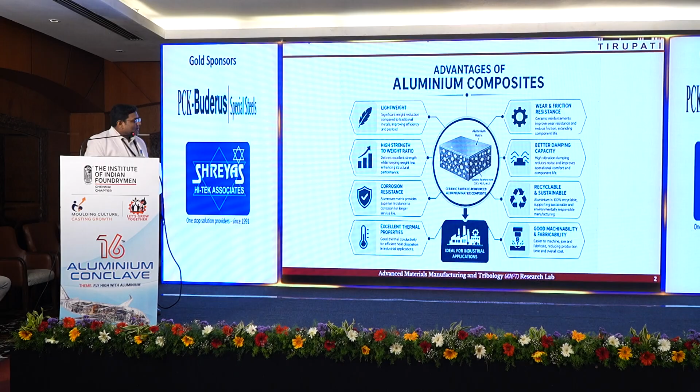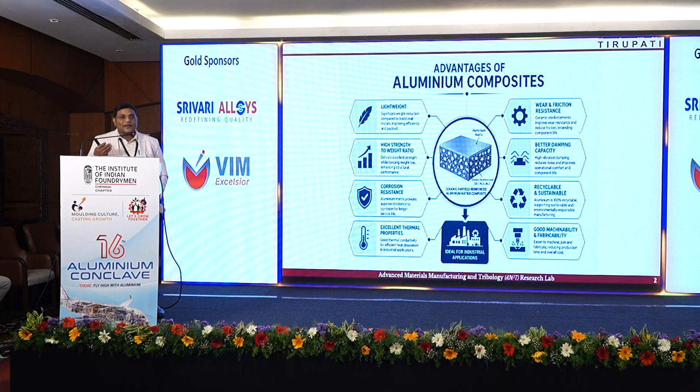So you have the matrix as aluminum, then you have these second phase materials. It can be any ceramic material - you start from silicon carbide, alumina, boron carbide, right? Those type of materials you can use for making these composite materials.

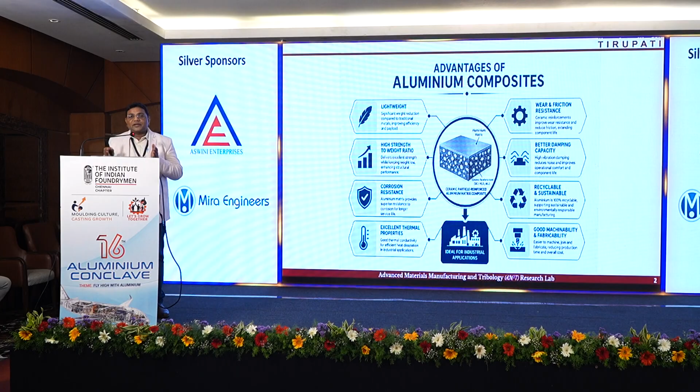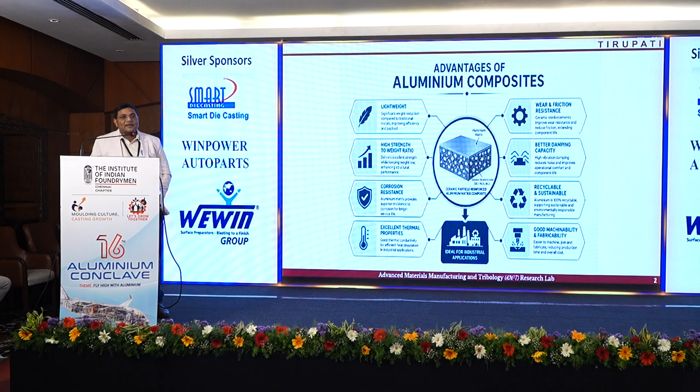Now you will ask a question, why do you want composites when you have aluminum alloys, when you have aluminum monolithic material? Why do you want another grade or type of composite material? When you take aluminum as a material, it is giving you the monolithic properties - you will have a set of mechanical or material related properties. But when you make the alloys, you say I am going to increase the strength of the alloy by mixing or putting in a lot of other alloying elements. But when you mix other elements, that is non-metallic elements, for example ceramic materials, you further increase the properties of the material overall.

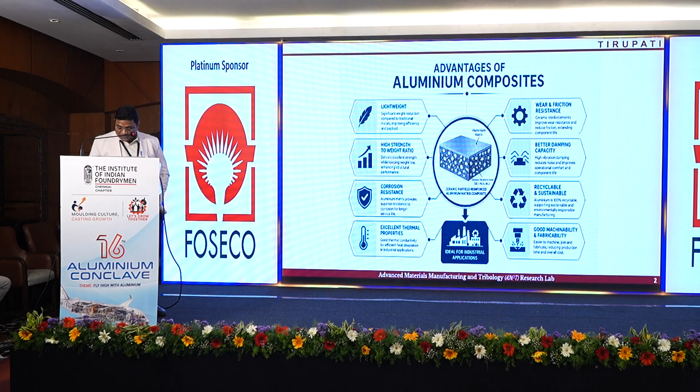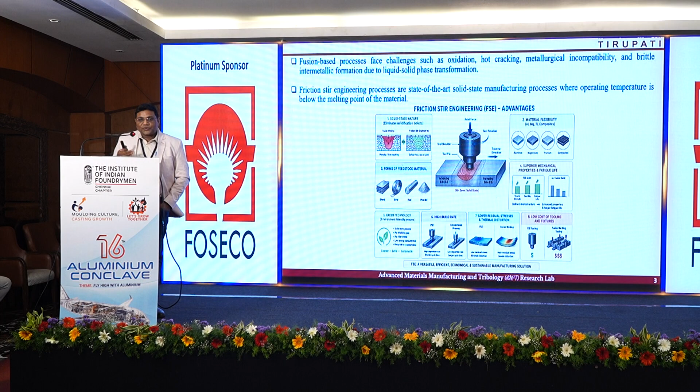So now another thing which I would like to share here is friction stir engineering. All of you are making different components using die casting or different casting processes, and all of you are also agreeing that we are getting a lot of defects in the casting, which you want to know, measure, and also want to eliminate. And Karthikeyan sir told that no, you cannot eliminate the defects, you can minimize the defects. So the percentage of defect which is acceptable, which you are still considering for your products.

Now all of you are aware about the microstructure which is there in the material. So microstructure plays a very important role. After you make the castings, you have to go through microstructural testing, or you can go through mechanical testing, right? Now we have non-destructive testing - so all these CT-related things come under non-destructive testing, where you are not cutting or destroying the material.

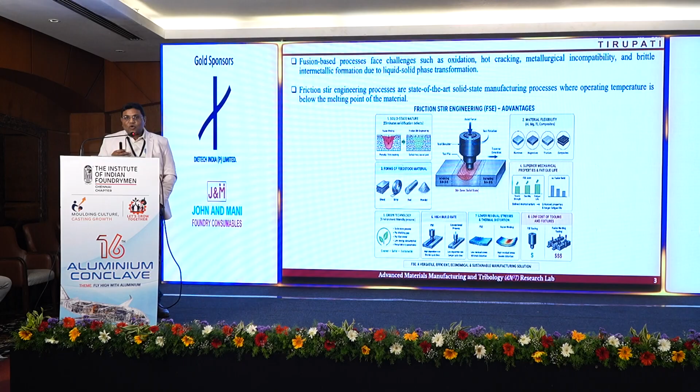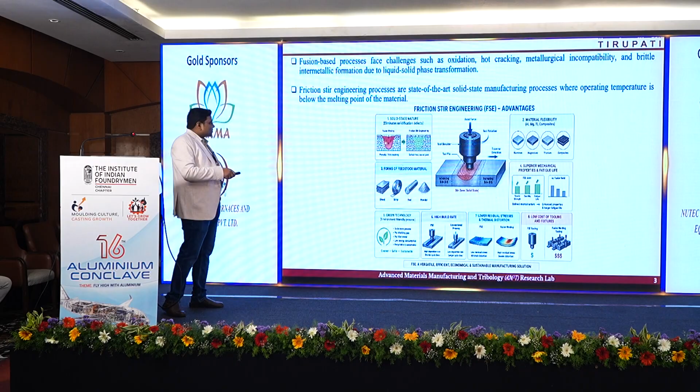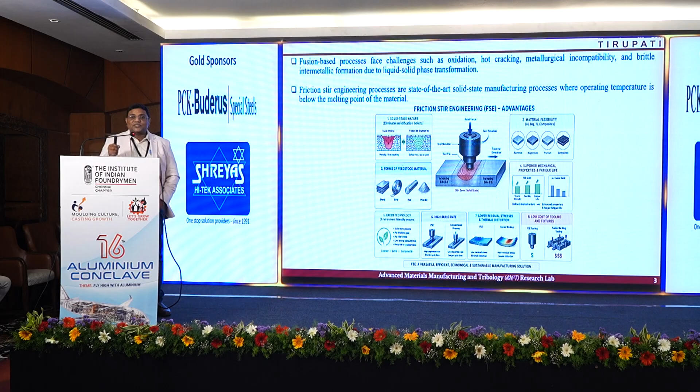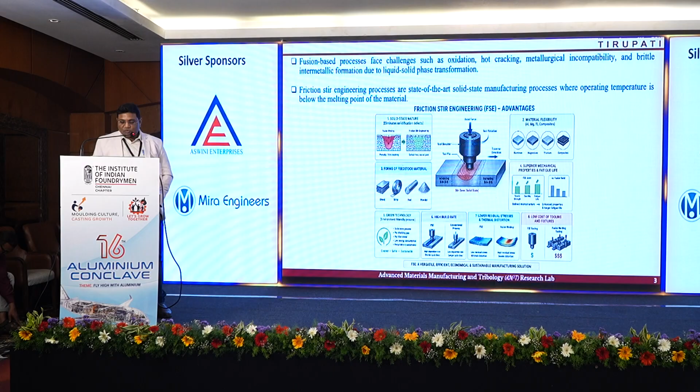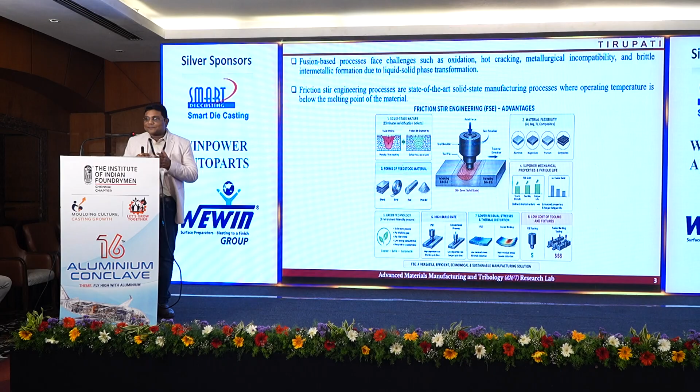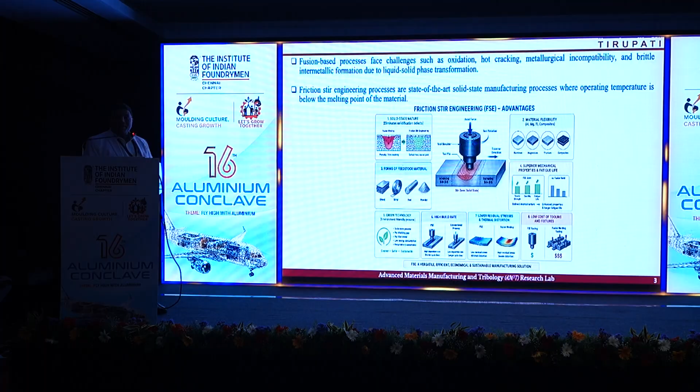Now here I am talking about friction. Friction is basically, all of you know that when two different components are sliding in opposite relative motion, you have friction between them. This friction is being generated when you have this contact.

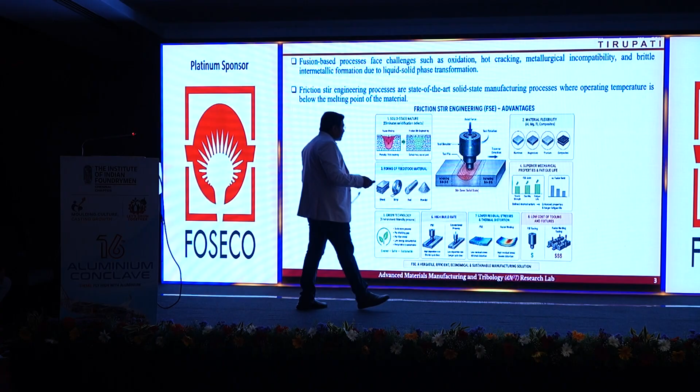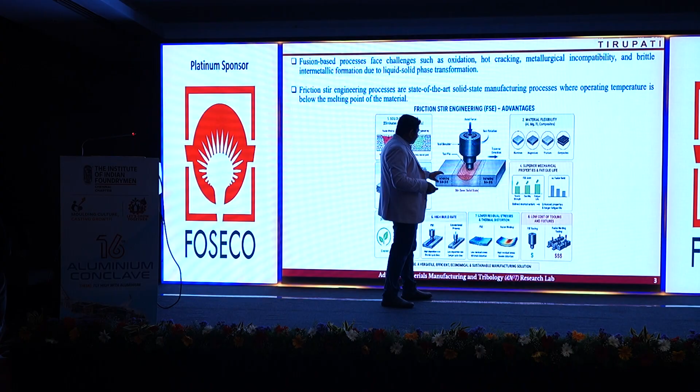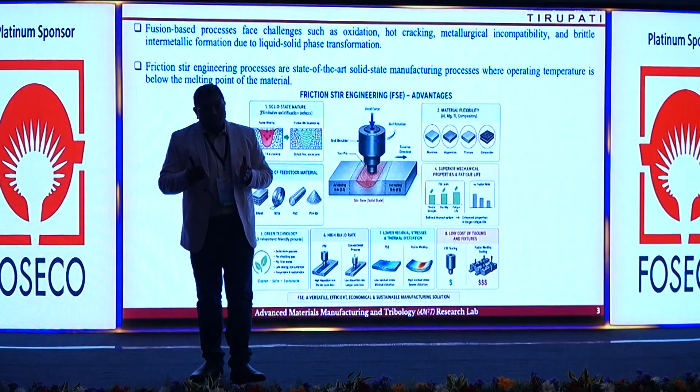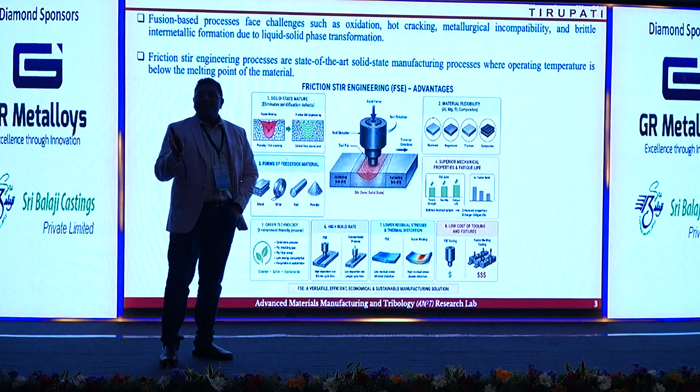This is called the friction stir tool. So you have this friction stir tool, and then you have this, let us say, a cast component or casting plate, and this tool you are rotating and also embedding into the metal plate. When this tool's shoulder touches the metal surface, friction will be generated. Due to that friction, frictional heat will generate. That frictional heat will plasticize the material, it will not melt the material. So we say you don't need to melt, you have to plasticize.

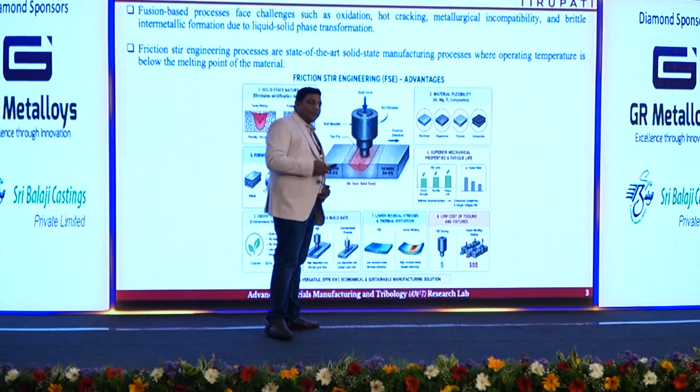So that plasticizing is happening, and that plasticizing will also help to mix the second phase material into the matrix material. That is how you try to achieve this.

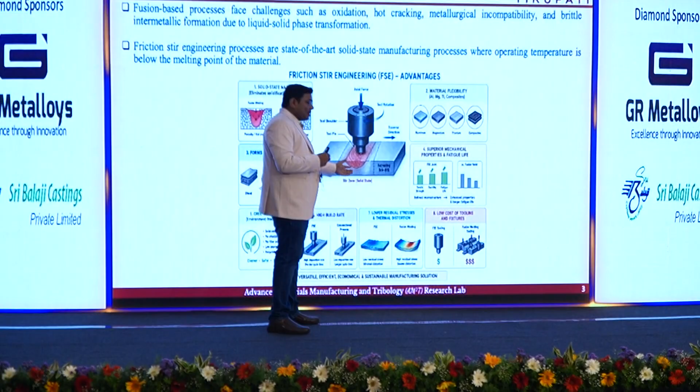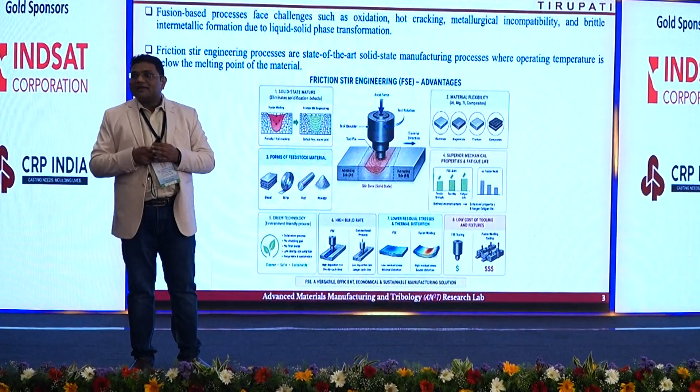There are many advantages of this process. First is you are refining the microstructure. So when we say refining the microstructure, you have the grains and grain boundaries in the material, right? And then you might have 2 micron grains, 5 micron, 10 micron, or 100 micron.

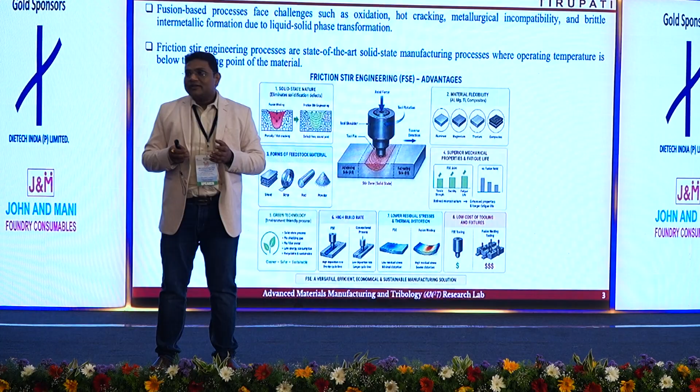So in any casting, you also see a lot of dendritic grains, right? Those dendritic grains, you must have seen the Christmas tree structure. Some of those dendrites also create problems because dendrites are not favorable for very good properties in the component. That is how we want to refine the microstructure.

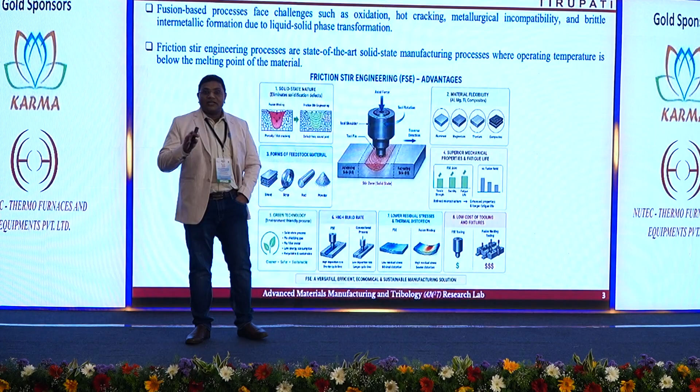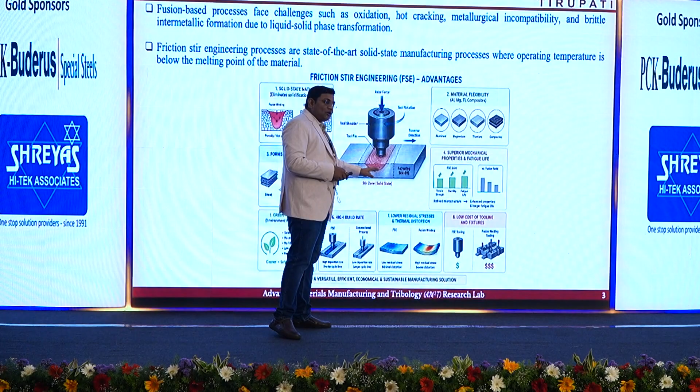So this process is also helping to refine the microstructure and remove the defects. Now you will ask how it will remove the defect. When you are doing this stirring operation, whatever defects are there in the cast plate will be eliminated, because you are doing the microstructure refinement as well as mixing the second phase or ceramic material into the metal matrix.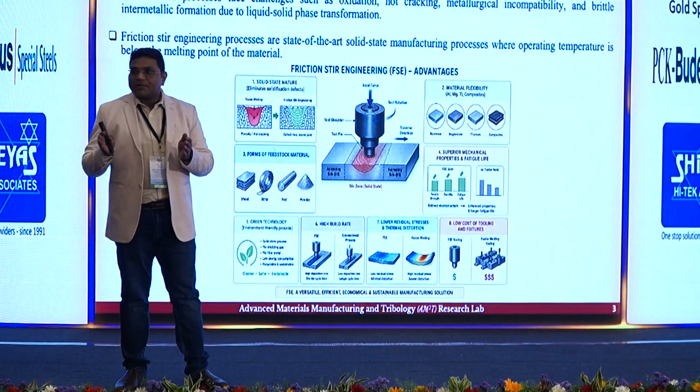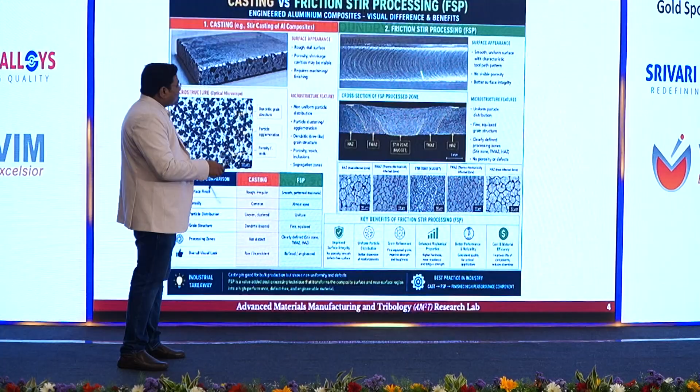Now you will ask a question, what is the size of those second phase ceramic particles? That also plays a very important role. So in casting you have a lot of defects, and then you have this friction stir processing where you are refining the microstructure, going from various microns to the submicron or

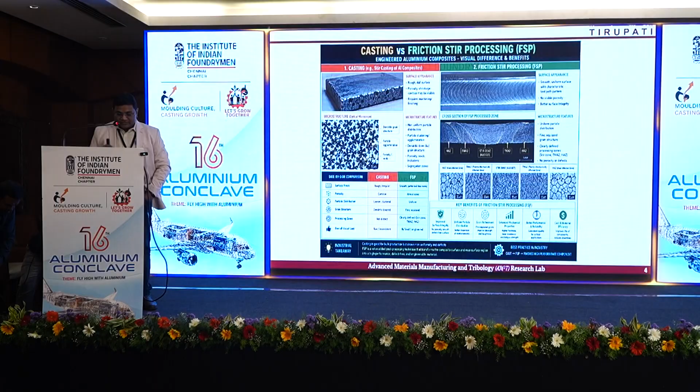sometimes the nano scale. So in casting you have a very rough surface, and also a lot of porosities, voids, defects are there, and grains are mostly dendritic grains in most castings. But when you do this process, you are refining the dendritic grains and it becomes more refined, which will improve the properties of the component.

So that is the advantage of at least integrating this friction stir engineering into your casting.

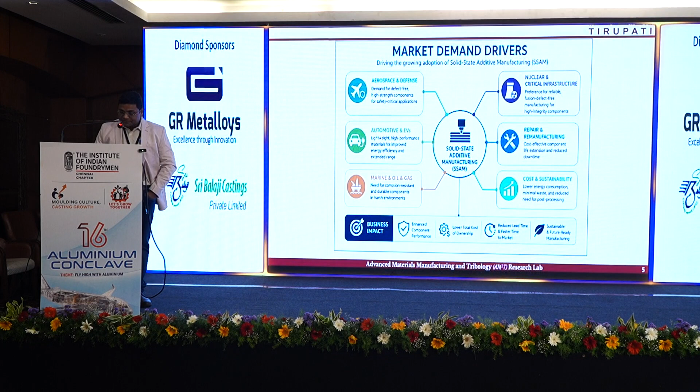Now because all of you are from the industry, you also understand the market demand of these materials. These materials are being used in different domains, starting from aerospace, automotives, and marine, and also repair and remanufacturing, and it has a lot of business opportunities for many industries.

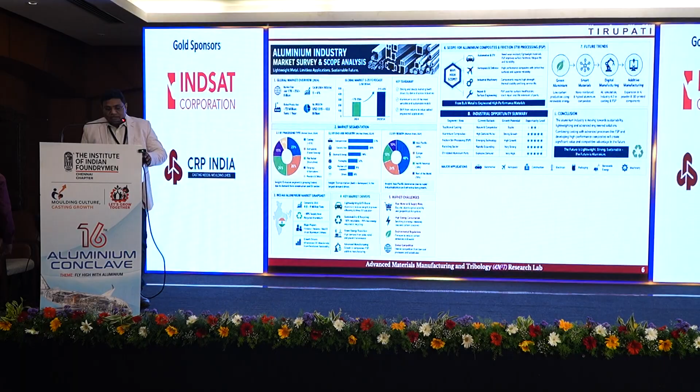Now about the aluminum global market you are also aware, but here I would like to focus on how this composite material has a lot of benefit when you talk about high performance materials. All of your castings are being used in regular applications, but when you talk about upgradation, and meeting the requirement of the current scenario, then these type of materials come into the picture. You also talk about nanotechnology, where you are going to mix nano materials into the metal.

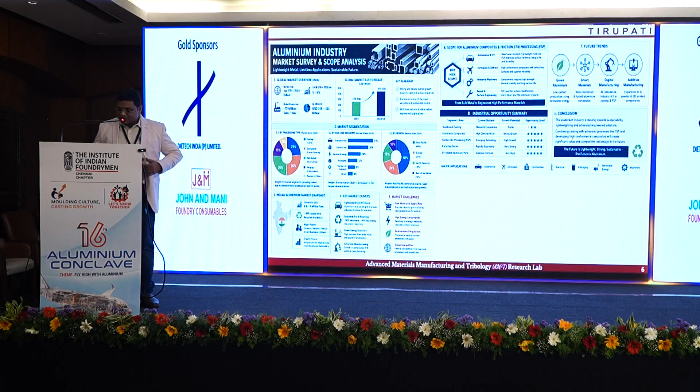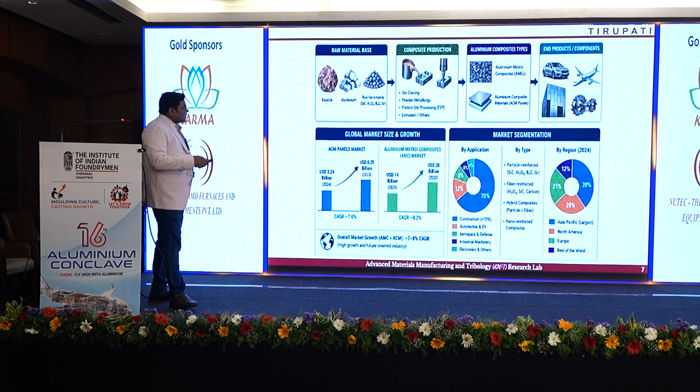So basically you are embedding the nanomaterials into your aluminum matrix, and that is how you will improve the properties and performance. So what I would like to convey here is you have the casting process, but if you can integrate this friction stir engineering into your castings to improve the properties and performance, then you have a very good scope to play an important role in the aluminum casting market.

There are different varieties of particles or ceramic materials which you can use. Even today, a lot of research is going on in developing new types of materials. These materials are all available in the market, but research is going on to make these materials more smart. There are some specific ceramic materials which can also play an important role, let us say shape memory ceramics. Based on your demand, they can perform as per your needs, and they fulfill the requirements of various industries.

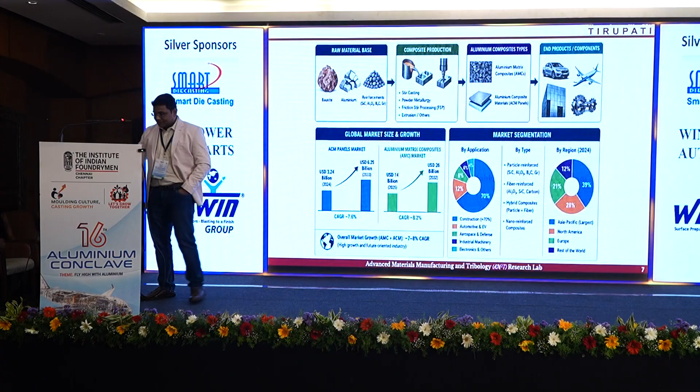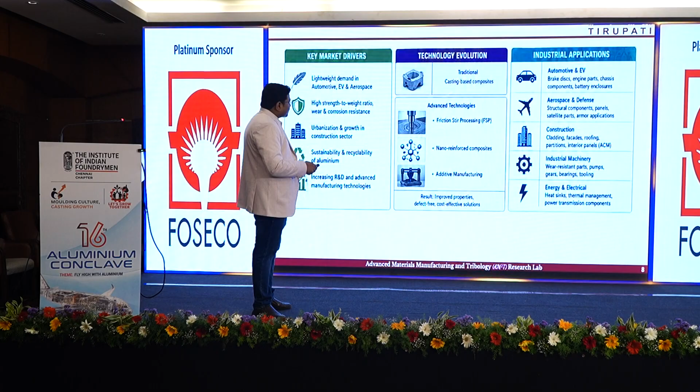So this will be the advanced approach to integrate the friction stir engineering approach into your castings. You can have friction stir processing, nano reinforced materials, and also additives. Today, additive manufacturing or 3D printing is now pervasive in all domains. You talk about aerospace, you talk about automotives, because they want to produce more components in less time. But in additive manufacturing also, they are facing a lot of problems.

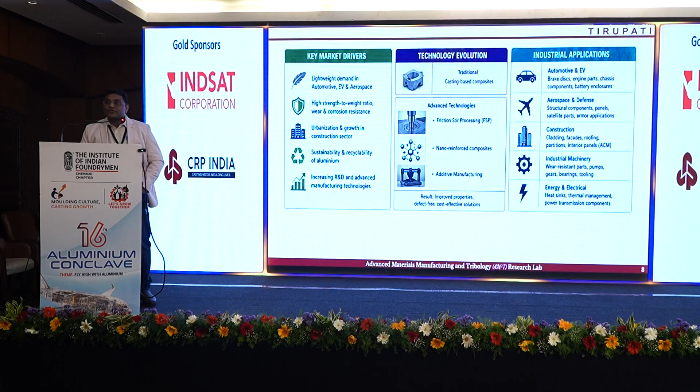The same defects which we talk about in casting, they are also talking about in additive manufacturing. They say, I have made an additive manufactured component using 3D printing, but it has defects. They are not getting proper fusion bonding between the layers. But if we can integrate this friction stir engineering into these 3D printed components, we can refine the microstructure as well as the bonding between the layers. That is how we can improve the performance of the components. So it has applications in automotives, aerospace, even construction industries, and also in energy and electrical systems.

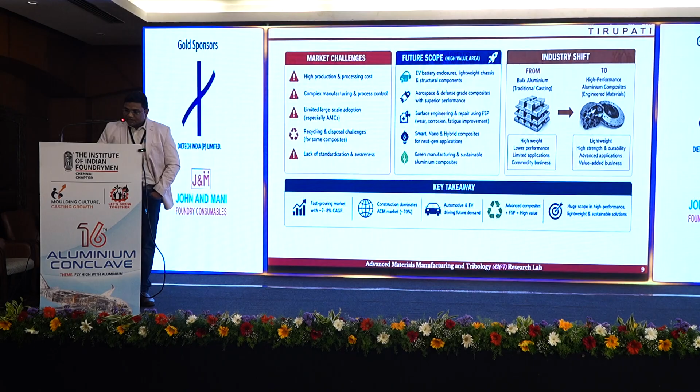Now we can also understand the future scope of this. Today we are also talking about electric vehicles. In electric vehicles we need lightweighting, so aluminum also plays an important role in electric vehicles. Although they are using a lot of FRP based composite materials in EVs, there are different needs, for example, EV battery enclosures. For EV battery enclosures, they need aluminum based materials.

So currently they are using existing materials, but for EV battery enclosures, aluminum requires a lot of properties which are not available now in the system. So these type of engineering approaches we can include, and also surface engineering has to play a very important role, along with smart nano hybrid composites, which are the next gen materials. So we are going to shift from bulk aluminum to high performance aluminum composites.

We all deal with this, but we also talk about the defects, we also talk about the microstructure not being good. But when we go for high performance composite materials, we have to basically think about these advanced approaches to integrate. It has a very good global market.

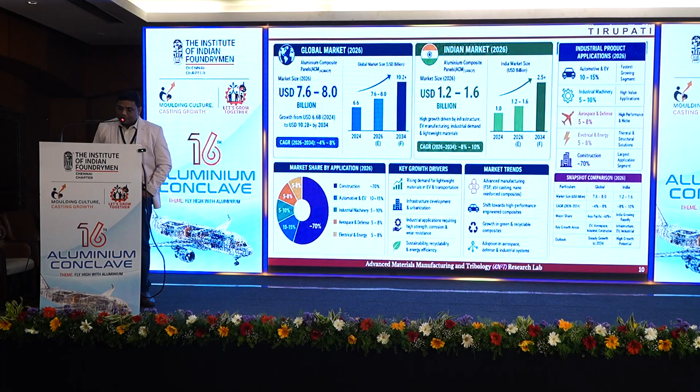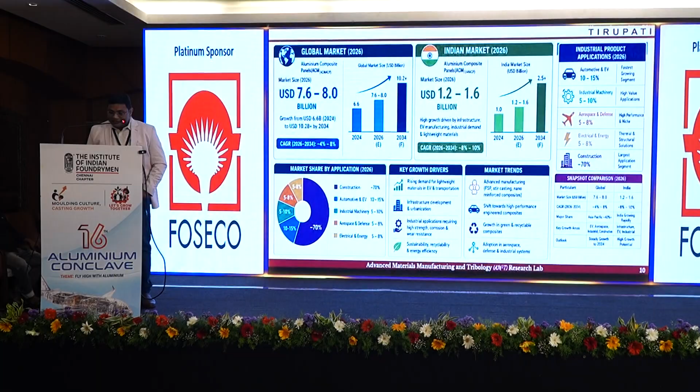So these type of aluminum composites will give you lightweight, high strength, and durability. You need high strength, but at the same time you also need more toughness. If you have high strength and not toughness, your component is going to fail very soon. So you need durability, corrosion and wear resistance, thermal stability, and stability in operation when the component is being used. So the future outlook, if you understand this, the aluminum composite market is very good.

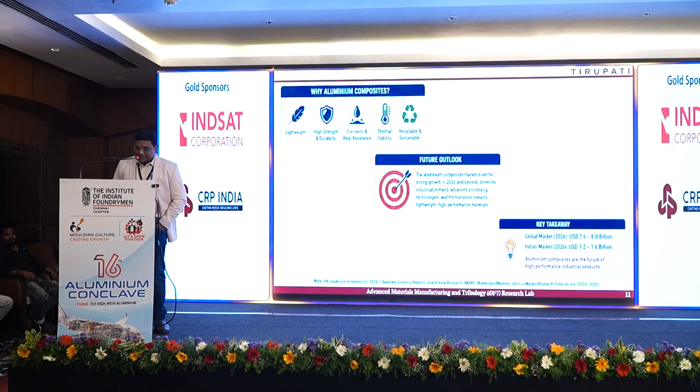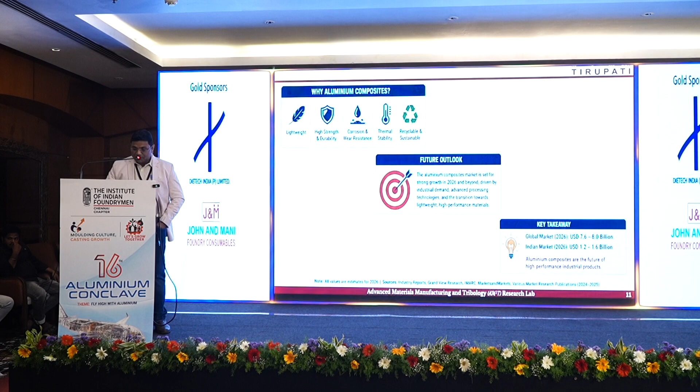It will also help reduce the weight of the material, because in conventional welding processes, you are basically using melting and solidification. So you get defects. But if you use this friction stir processing approach, you can do easy welding without adding more weight, and you remove all the defects found in conventional welding. This is an established process that our defense industry and aerospace industry are using for critical applications.

So friction stir engineering is a game changer for automotive aluminum industries if they understand the process and adapt it properly.

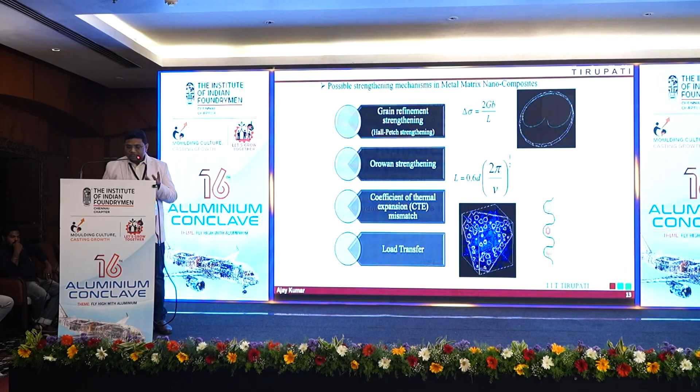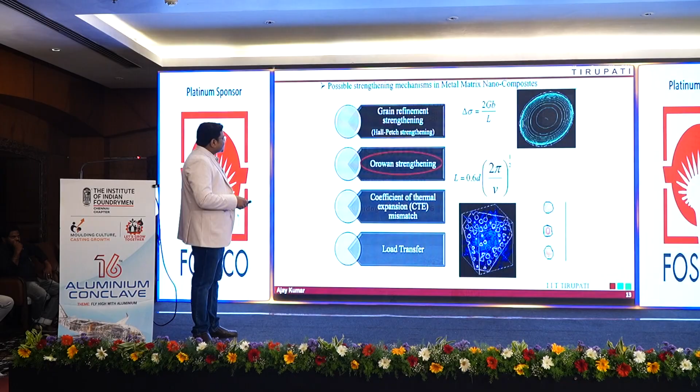Now, to understand the fundamentals of how this mechanism works: being a student of engineering, you can consider that we study the strengthening mechanisms from this perspective. One is grain refinement - you have to refine the microstructure of your castings. If the microstructure is not good, your casting will not sustain for a long time.

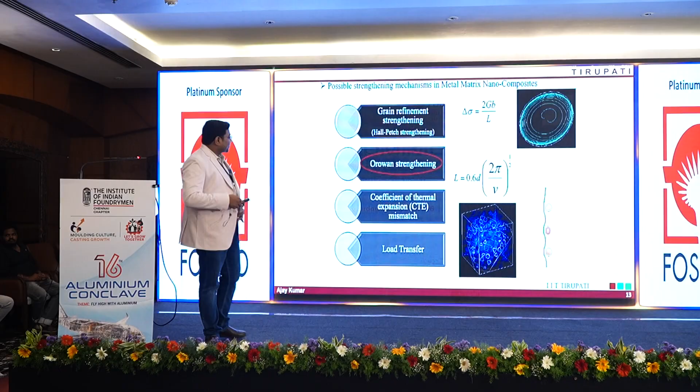We also study the Orowan strengthening. We talk about this at the micro level or nano level. There are a lot of mechanisms operative in the material, so we study the dislocations, which are activated when your component is being used.

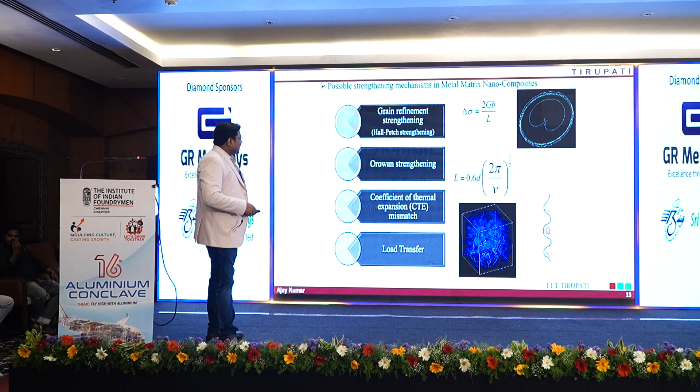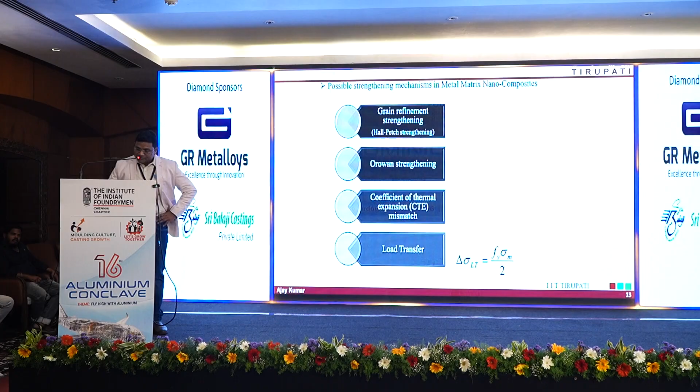It is experiencing a lot of static or dynamic loading. So when components go under these types of loadings, these types of mechanisms will be activated, and they will decide whether the component will last for a long time or have a short life. So these are the fundamentals, just for your information.

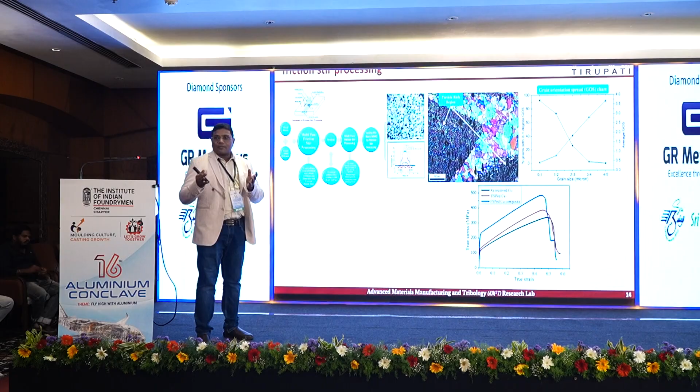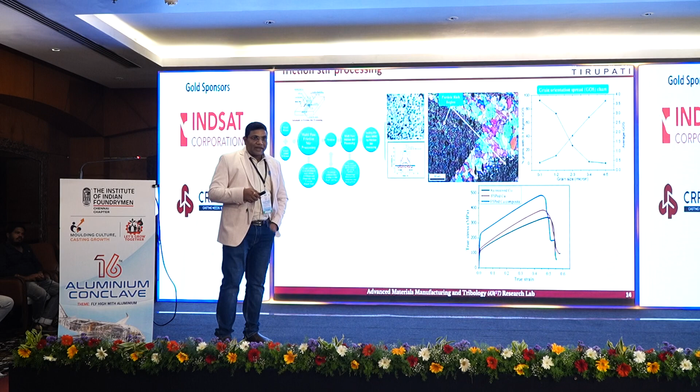Now we have conducted a few studies on how you can introduce these second phase or ceramic materials inside aluminum. We have done studies where we could embed these ceramic particles at around 5 to 10 nanometer scale, and we could see the strength rise up. This is an example where we have done the study on copper based materials.

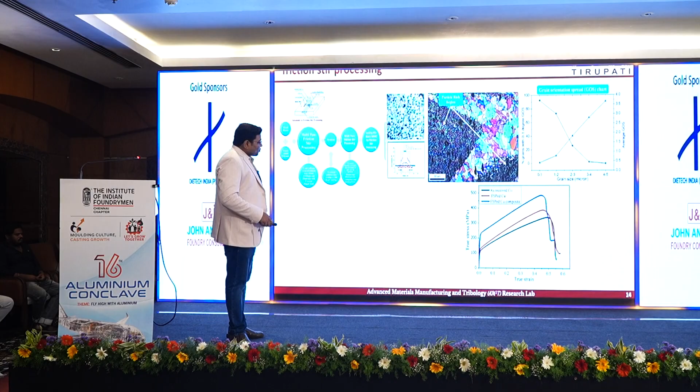We have mixed ceramic materials known as polymer derived ceramics, for high temperature applications. We could see that strength is increasing, and also the ductility or toughness is increasing for the composite materials.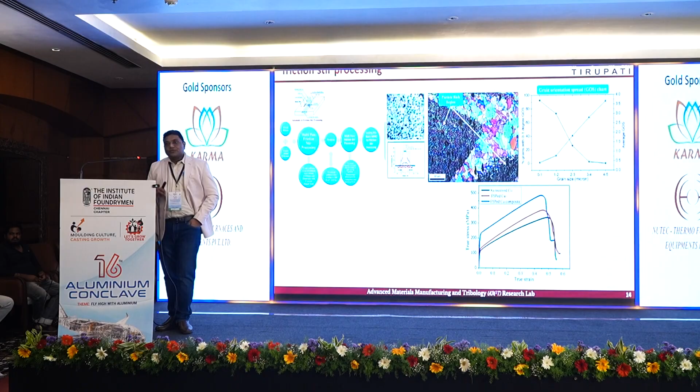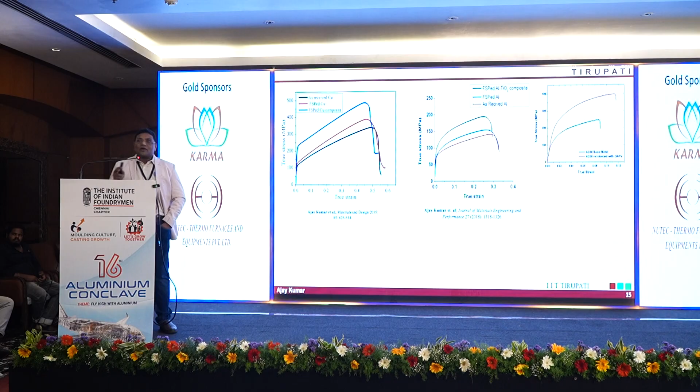So that is how you are maintaining strength as well as toughness. This type of study we have done on aluminum, on copper, and even on aluminum and graphene based materials, where we could see very good improvement in the properties - strength is going up and toughness is also going up. So I will quickly spend a little time on the current study we are doing.

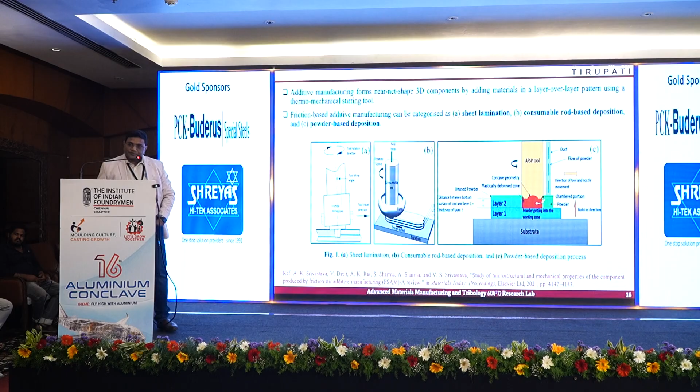Now this approach can also be used for deposition, additive manufacturing. You can also deposit the metal, you can also deposit aluminum based composite materials. We used 7000 series alloy, and we used yttria stabilized zirconia.

This is one of the shape memory ceramic materials, along with polymer derived ceramic materials - silicon based ceramic materials which we process in the lab. We used these materials for doing experiments in our common milling machines in the lab, to understand the physics behind the experiment, and we could actually deposit these composite layers.

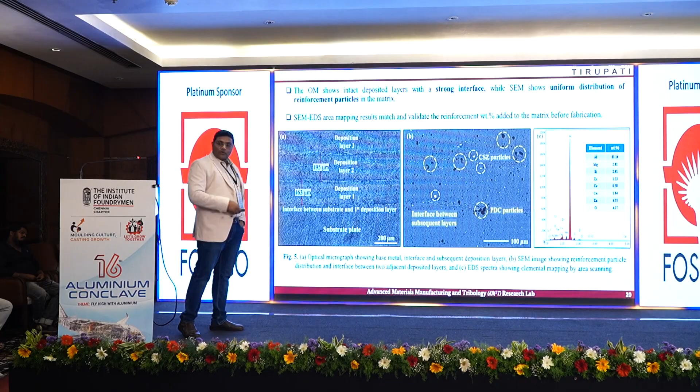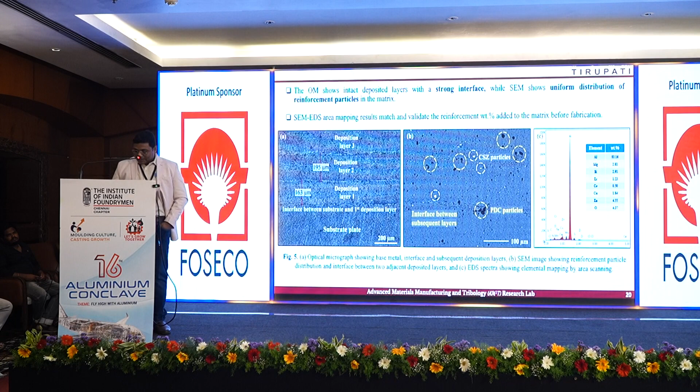We could deposit almost 3.7 to 4 mm thickness composite materials using this. You can see the distribution of the second phase particles inside the matrix - there is no defect compared to the casting. And you can deposit layer by layer. This study we have done at the scale of 100 micron, and the beauty of this process is the microstructure and refinement of the particles.

Now you can also see this - we study the microstructure using electron backscatter diffraction techniques. You can see here the microstructure, and you can see the average grain size of around 6 micron.

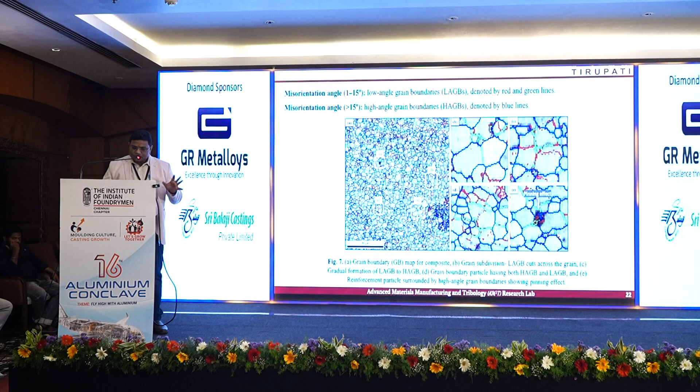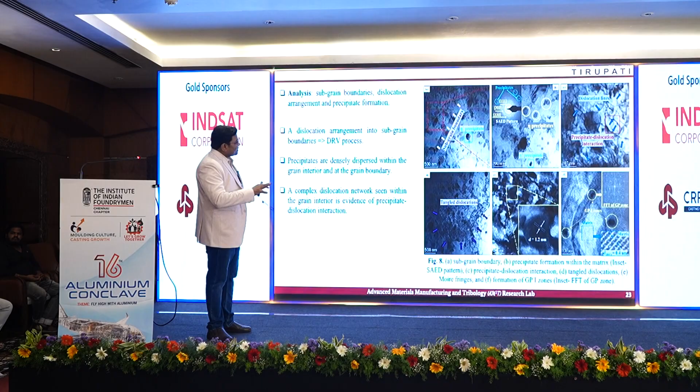So this is how we can refine the microstructure and study the fundamentals. We do all the microstructural engineering after making these materials, and we can also go to the nano scale. This scale is 500 nanometers, this is 200 nanometers. At this scale we can see what is happening in the material.

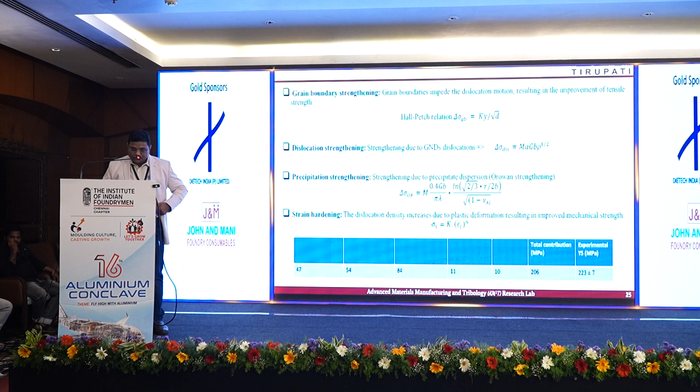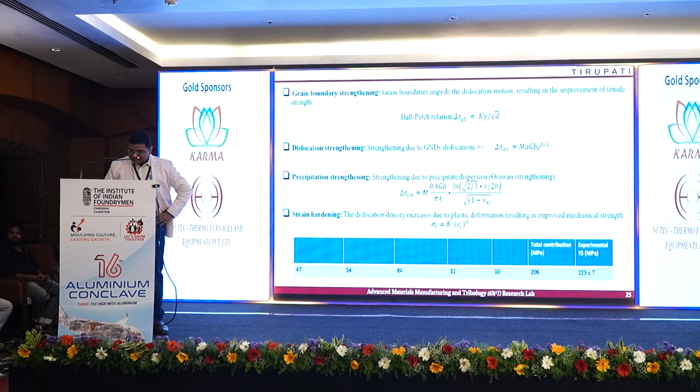These types of studies are shown just for demonstration, and using this we do measurements of which strengthening mechanism is more active. This way we can also evaluate and understand the performance of the material.

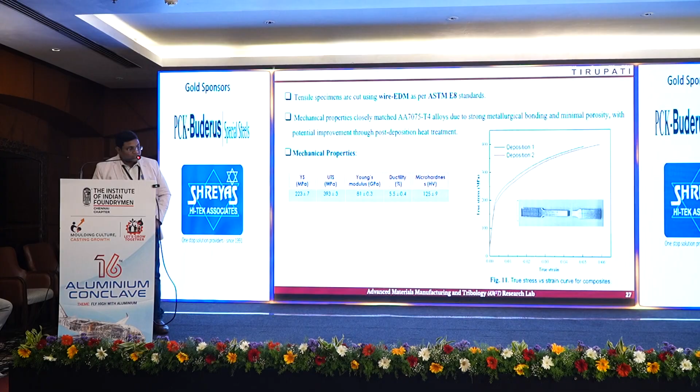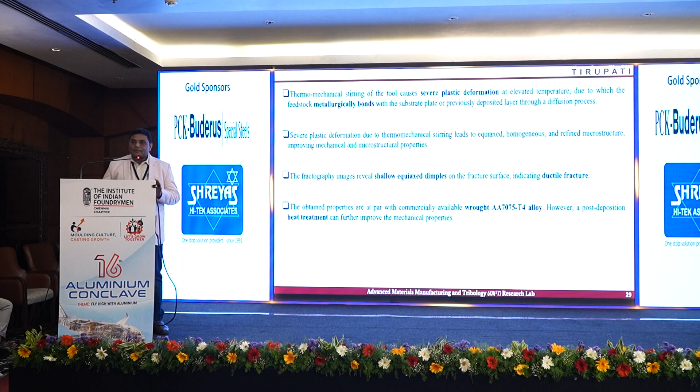This is the study of hardness. We have seen significant improvement, and you can also see significant improvement in the mechanical properties here. This is a common practice which we have, basically severe plastic deformation. The speed at which you do this severe plastic deformation will decide the performance of the material.

Now I also want to show you a few slides on corrosion. Many aluminum alloy components are used in places where you have to take care of corrosion. When you refine the microstructure at the micro scale or nano scale, you are also addressing corrosion resistance, because that becomes very prone in this.

So by and large, what I would like to convey is that in these castings, if you want to improve the properties and performance, considering the real-time scenario and the demand of the current market, we should integrate such techniques with our existing process so that we can fulfill the requirement of customers and sustain in the market.

So with this, I thank you for your time, and I look forward to your questions and answers. Thank you, sir.

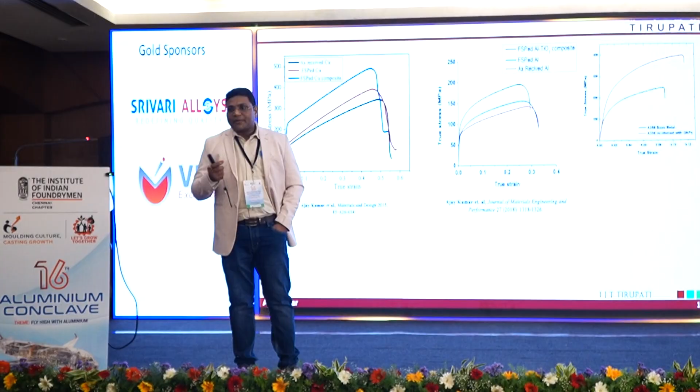Many castings use graphite for different purposes, and graphite actually has very low wettability with aluminium. Increasing the wettability is also a challenge. So when you mix graphite or carbon in molten aluminium, it agglomerates very fast, and being a casting person, you have to disperse it uniformly.

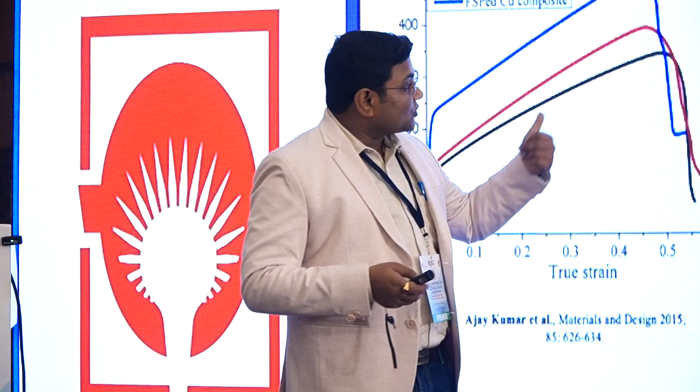This friction-based process is helping to exfoliate those graphene layers in many ways, because you are using a shearing process. Friction is basically a shearing operation. So when you have graphite, you apply the shearing force and keep exfoliating. Graphene is basically produced by exfoliation, and there are different chemical techniques. This process allows us to exfoliate multi-layer graphite into 2, 3, or 4 layers of graphene, which is the advantage of mixing these graphene layers using this process.

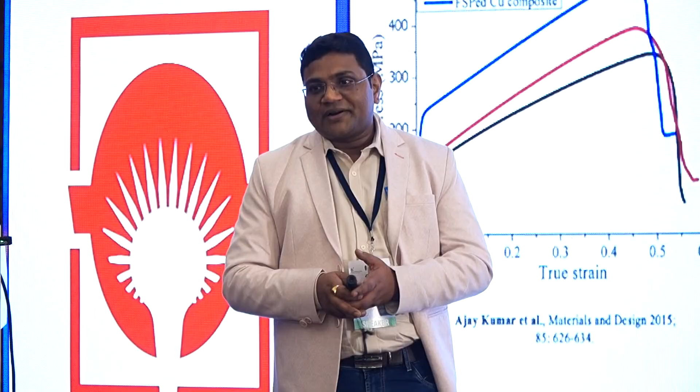This is done in a solid condition, not in melting, because melting is difficult. In melting you get a chunk of graphite agglomerated at one place, which is difficult. So we are taking the carbon by force into the base, somehow embedding and making a coating of those graphene nanoplatelets over the metal, and then applying this process for further exfoliation and distribution.

Thank you, sir. Thank you, sir.